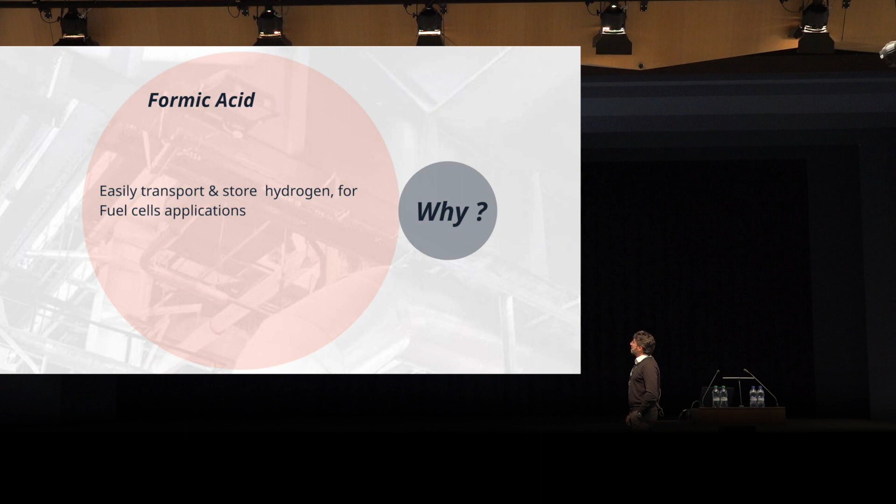Quickly, formic acid. Why are we interested in formic acid? Because it's easy to transport and store hydrogen, ideally for fuel cell applications. It's a liquid at ambient condition, easy to handle, with quite high density of hydrogen, equivalent to 700 bars of hydrogen storage, and almost 1 kilowatt-hour of electrical energy stored in 1 liter of formic acid.

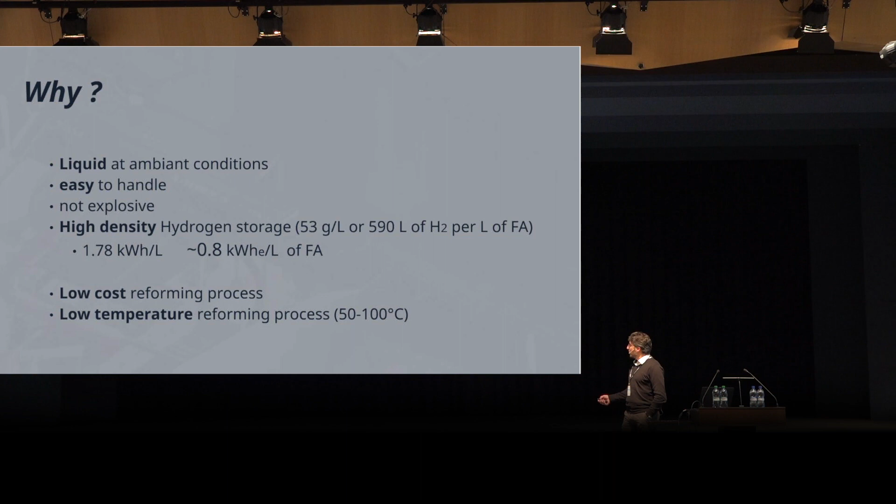And we have a low-cost reforming process at low temperature, below between 50 and 100 degrees.

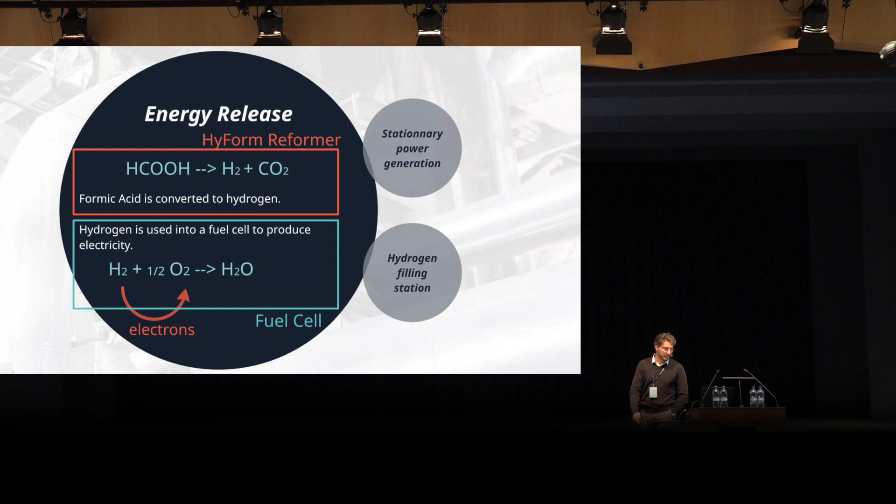So how do we use that? We set up a project to demonstrate the energy release part, how to produce electricity and heat from formic acid with the use of a fuel cell. Based on the catalyst development made by Gabor Laurenczy, we called it the HyForm reformer, to convert the formic acid into a gas mixture of hydrogen and CO2. We use this hydrogen in a fuel cell to produce electricity, to make it rather simple.

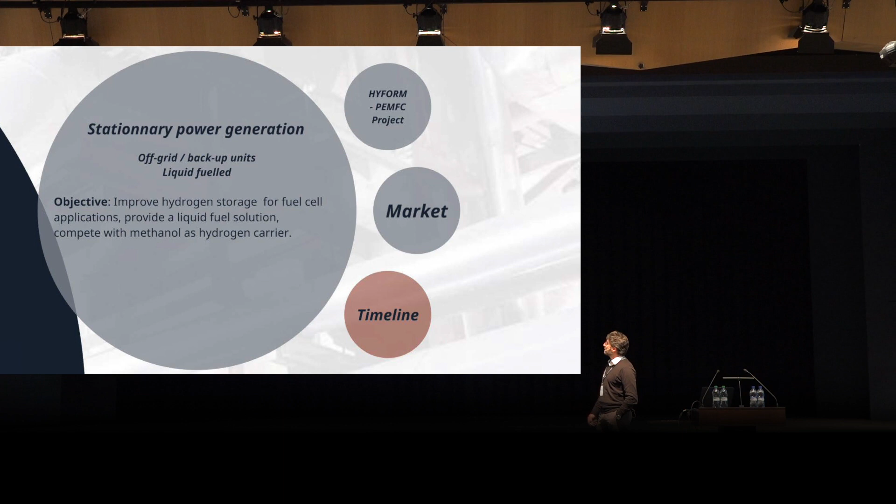The first application and demonstration we've made here is stationary power generation, with the objective to improve hydrogen storage for fuel cell applications like off-grid or backup units, using a liquid fuel rather than a gaseous fuel, and to compete with methanol, for example, which is already used in some cases as a hydrogen carrier.

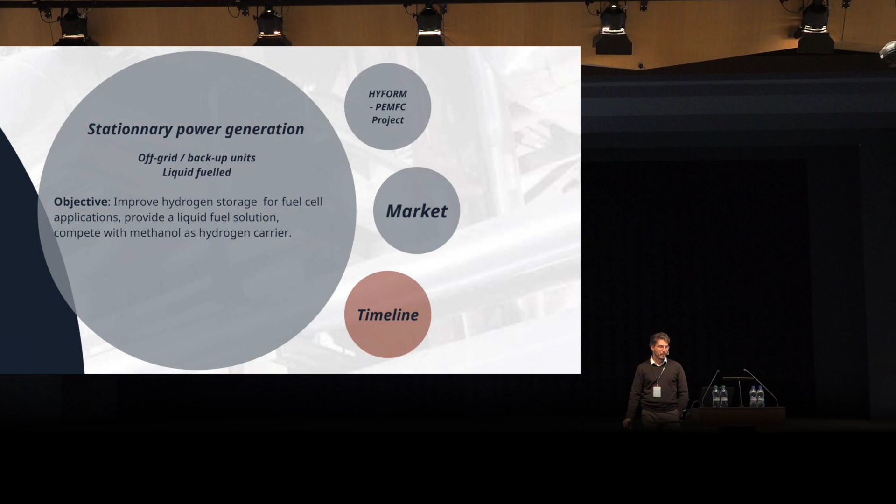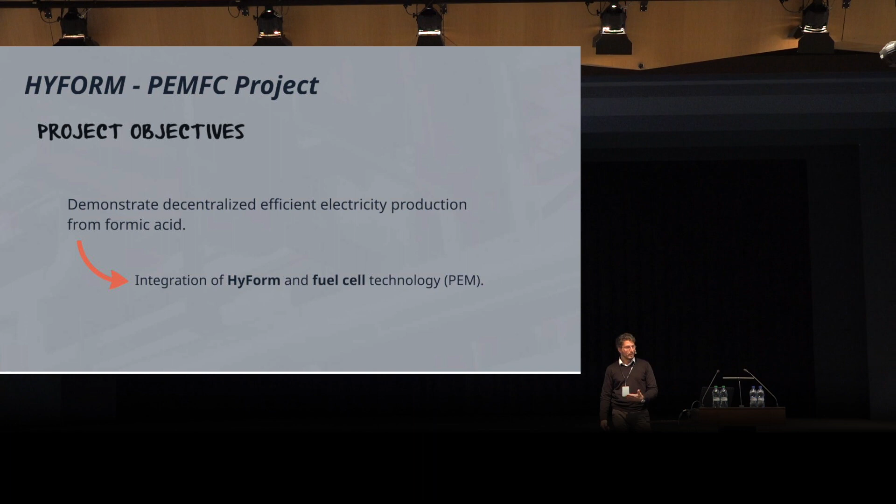So the project objective was to integrate the reformer, this formic acid reformer, and combine it with a fuel cell, a PEM fuel cell in this case.

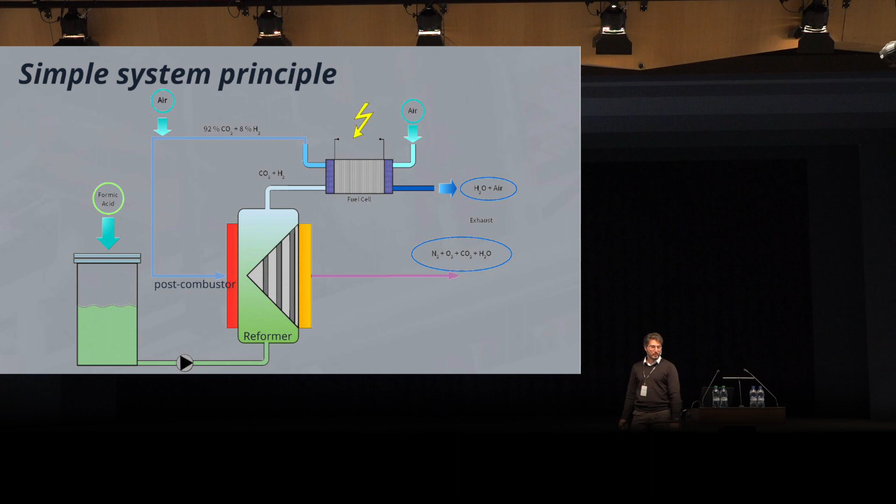Now, how we made it look like an integrated unit. We took a commercial unit to demonstrate that the technology is compatible with existing units. We took a 5 kilowatt system, but we had to downgrade to 1 kilowatt for economic reasons, since the cost of systems is still quite high for fuel cells.

We developed the control and safety and the hardware, the software, and designed a specific reformer in order to fit the power demand, the gas flows, and the recuperation of the post-combustion heat, with a specific catalytic post-combustion, in order to replace the standard natural gas reformer that is in place in the standard system.

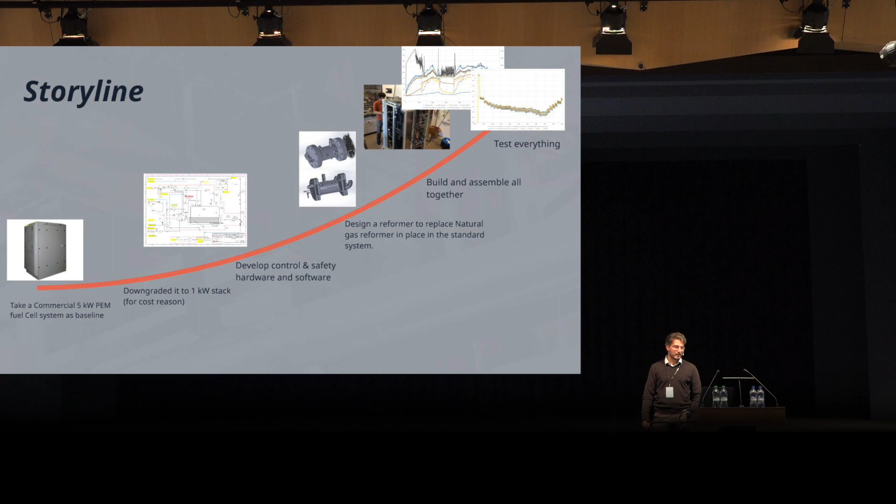Then we had to build and assemble everything together, and finally test with some cycles to fine-tune the system, how to control the fuel cell and the reformer at the same time, to have good integration and produce electrical power.

The team was composed of the EPFL group of Catalysis for Energy and Environment, the GRT group, thanks to the financing support of the Swiss Federal Office for Energy, and in-house engineering for the fuel cell part.

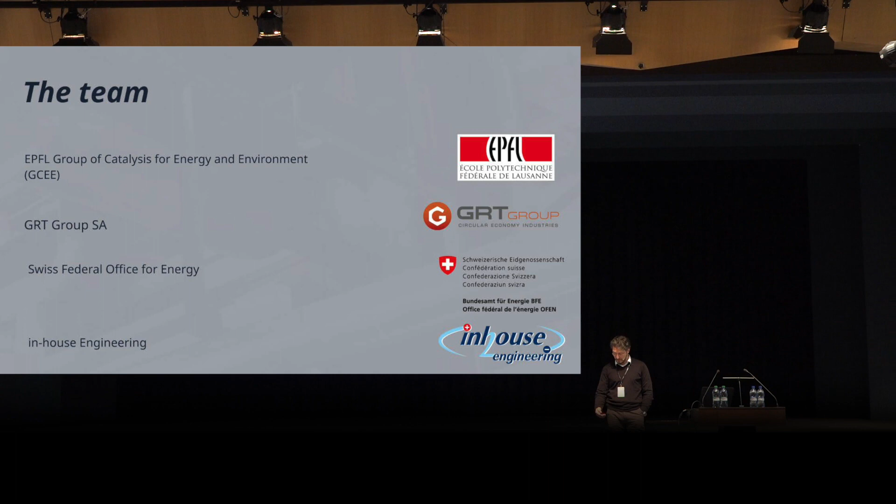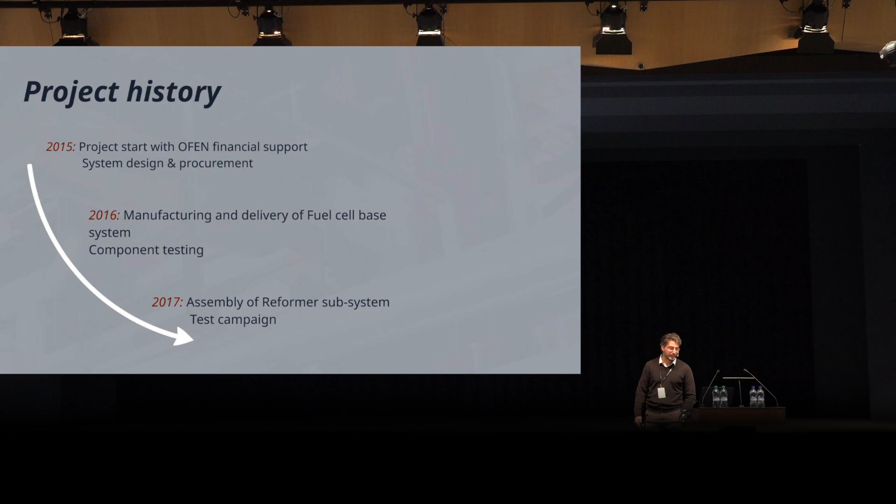The project started in 2015 with system design and procurement. In 2016, manufacturing and delivery of the fuel cell and components, and individual component testing. In 2017, last year, assembly of the reformer and testing of the reformer, plus the full test campaign.

So the reformer used the heat of the fuel cell and the post-combustion. And we obtained 40 to 45% stack efficiency over a range of power from 400 to 950, so almost 1 kilowatt. No degradation observed during the operation.

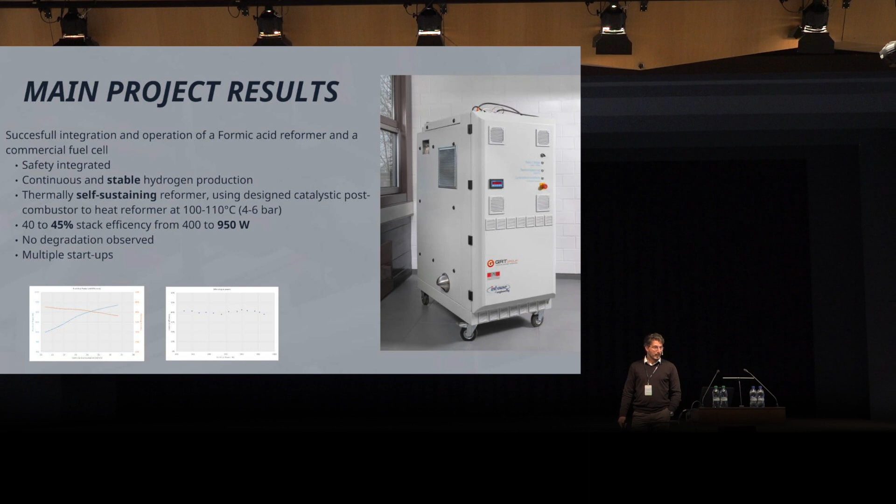Okay, so now which market do we target with such kind of application? As I mentioned, off-grid backup power generation unit, because it's easy to fuel and refill since we have a liquid fuel. We made this demonstration with a PEM fuel cell, but solid oxide fuel cells are also fully capable of using this mixture of hydrogen and CO2.

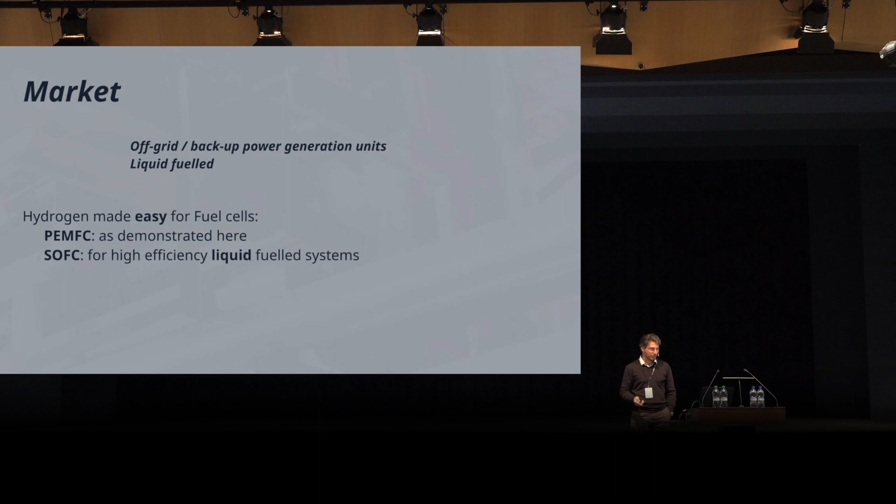Quickly on the advantage: we can show a low temperature reforming between 40 and 90-100 degrees. We can use the PEM fuel cell heat to power the needed heat for the reformer. In the next generation, we wouldn't need to burn a part of the fuel. We can have fast startup time because it's just a short, quick heat-up. And we produce between 0.8 and 0.9 kilowatt-hour of electricity per liter of formic acid.

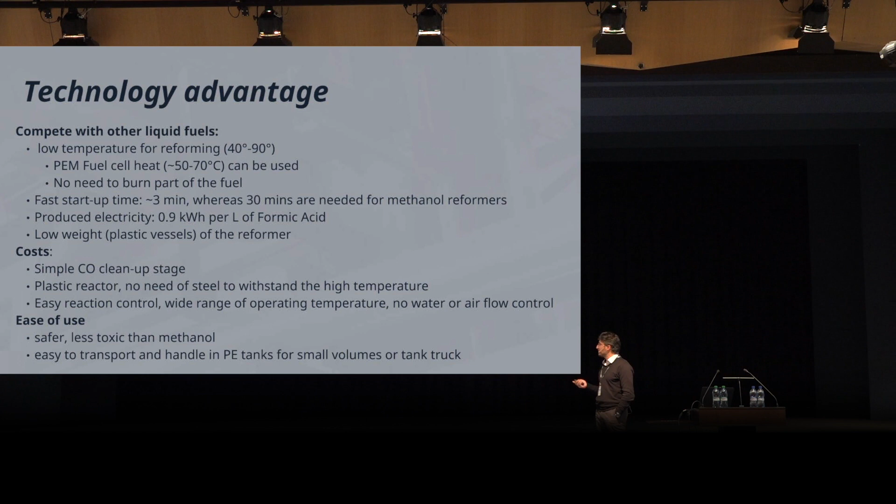And with this low temperature, we can reach low weight with plastic vessels. On cost, we have a simple CO cleaning stage. As I mentioned, if we go towards plastic, we can use a plastic reactor, which is easy to manufacture and handle, and the control of the reaction is really simple. So we can state that we have ease of use because of the formic acid, which is safer and less toxic than methanol, and easy to transport in PE tanks.

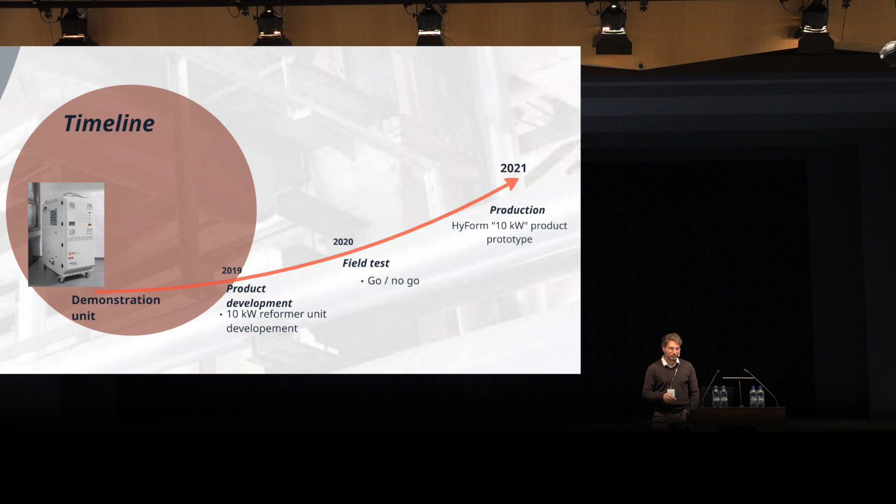So we have made this demonstration unit. Our intent is to develop a 10 kilowatt reformer unit as a product development and go into field test for later complete system prototyping.

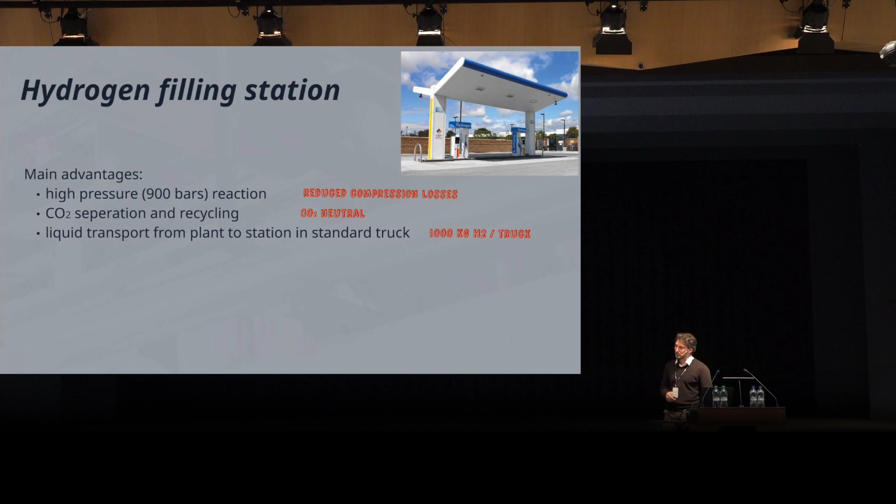Another point that Professor Laurenczy mentioned earlier is the hydrogen filling station, because the reaction can be made at high pressure and produce directly compressed hydrogen, for example for a filling station, and allow easy transport from plants to filling station. We can reduce the compression losses, we can recover the CO2 and be CO2 neutral, and we can have 1 ton of hydrogen per truck for transport.

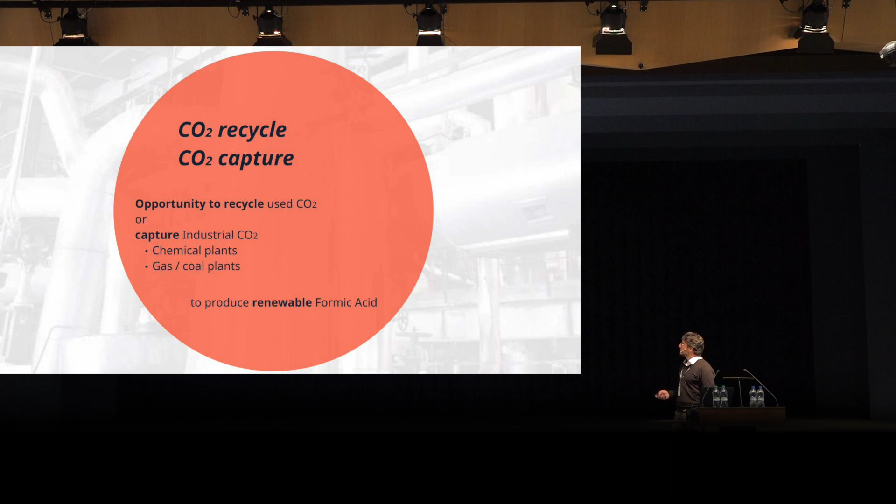Okay, so this demonstration is one block within a full cycle and storage. I need to be quick, I'm almost finished. So with the actual demonstration, we had not recovered the CO2, but this is possible with a highly concentrated stream of CO2 or by capturing CO2 from industry. We could produce renewable formic acid and then close the cycle, having energy storage to convert renewable electricity into hydrogen stored in the form of formic acid.

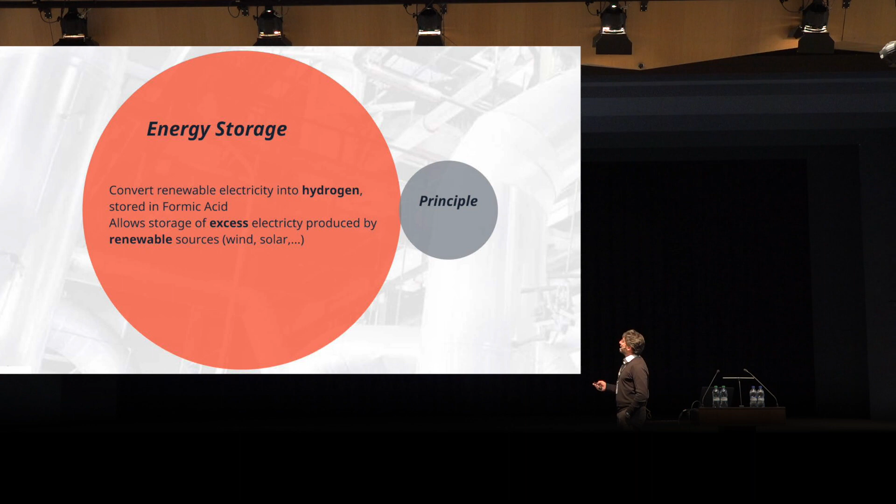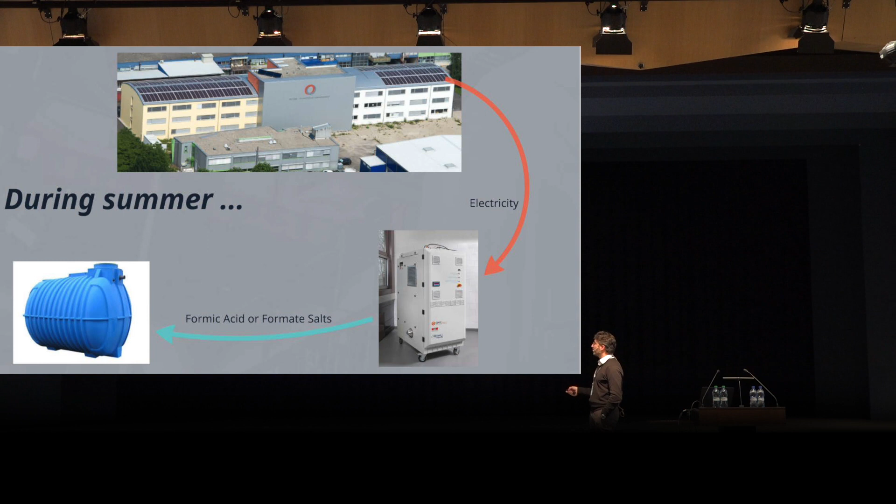Let's finish, okay, a quick two slides. So my last slides, our next project. The idea would be to develop the rest of the cycle, to store electricity, for example during summer, into formic acid or formate salts, and during the winter use the stored hydrogen in this form, converted into heat and electricity for the winter.

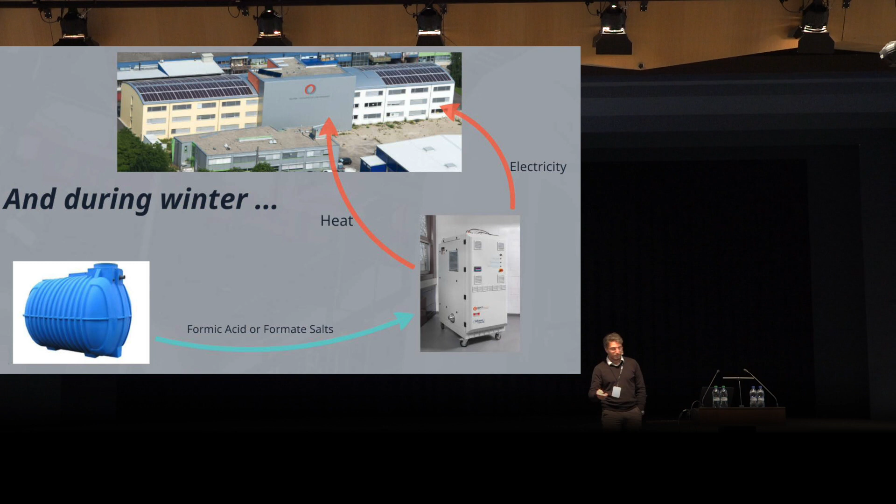So this is it for my presentation. This is our project of the last years and the future that we want to implement.